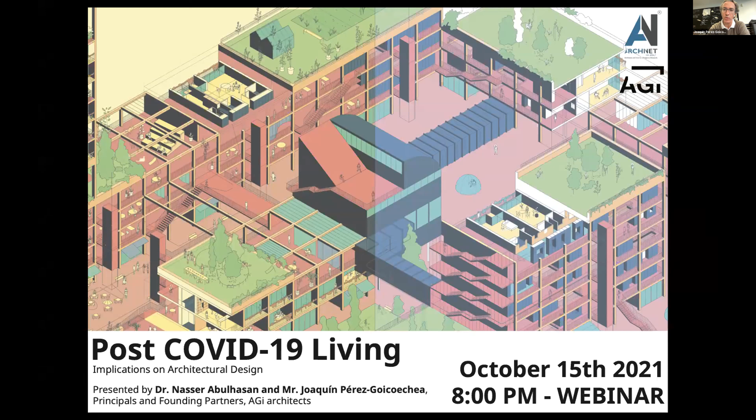The only thing that COVID has done is accelerate all these dynamics. This is why when we talk about post-COVID, we talk about something that already existed, but has brought some change in the way that we will confront, in the future, the way that we live.

The first thing that we are going to talk about, and you will see it later, is that we have structured our presentation in 4 chapters. One about the future living, where we will be addressing the main concepts of our thinking, and then how we have implemented them at different scales, because that is also quite relevant.

We will go through some of our work, but in a very fast way, mainly in images. But in each of them, we will tell you what we think, or what has been the base of our work. The first thing that we wanted to mention is the responsibility as an architect or designer in the built environment.

It is something that we have always been aware of, but right now, through the pandemic situation, it has been even more relevant. This is why when we talk about the pandemic, or the future after the pandemic, it's about how relevant it is for an architect now to approach certain issues that not only talk about health issues, but about the way we live, and the way a society develops itself.

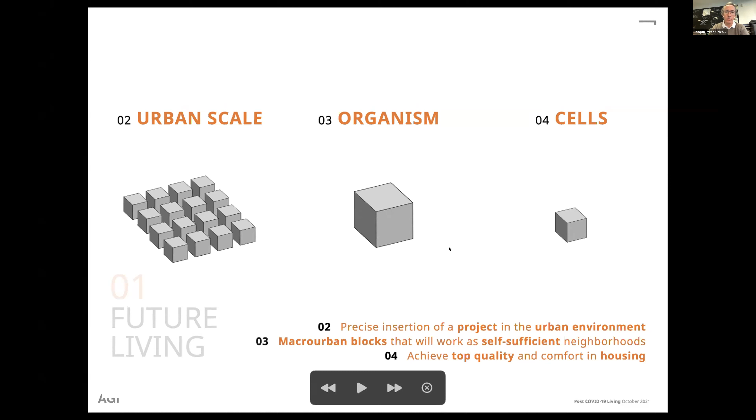But it's something that is still self-sufficient. And then we go to the level of the cell, that is the living space of any inhabitant that we know we are addressing, that we are just thinking or designing for.

What is important for us, for sure, and you will see it later on, is a mind map that we have done, and we normally do it in all our projects.

There are certain parameters, certain issues that we consider have to be addressed constantly, which is sustainability. These are the parameters that we have seen in many cases have been neglected, but right now it's something that, although we were addressing it in certain cases, we see that it's extremely even more relevant to address now. So, adaptability...

Transformability — why are we saying that? Because we cannot destroy cities to rebuild new cities. We will need to work with the urban fabric, the existing urban fabric, and transform it into a positive, or healthy, unit.

And to provide these other parameters that we like to talk about in healthy living, linked with an identity. An identity, when we talk about it, is really a topic that especially in the Middle East a lot of people like to talk about. It already involves so many things, from society to culture to politics to economics.

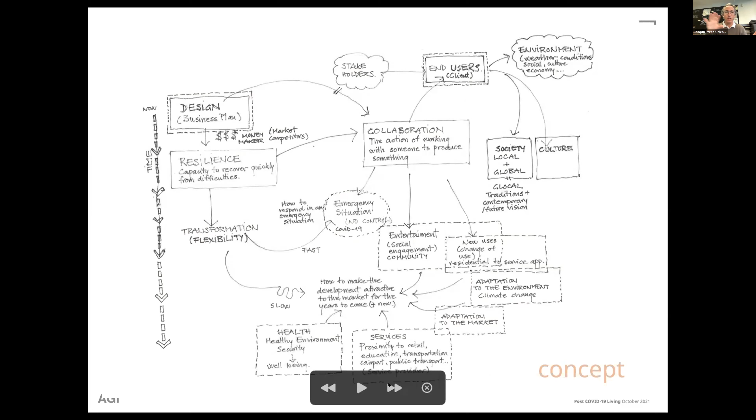So again, when we confront any project, we are always talking about these types of topics: collaboration, resilience, business plan. Even a business plan, because unless the projects we do have resilience in time, it's going to be very difficult to make them successful. And business plan, we're not always only talking about a business plan for the developer, it has to be successful for the whole society at all levels.

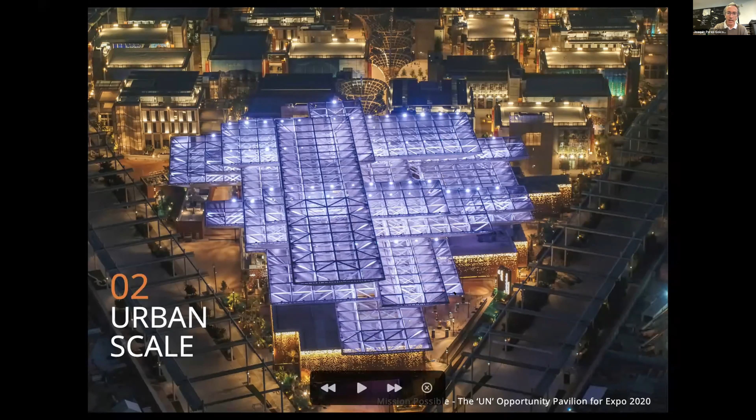One of the things that, let's jump now a bit more into our work, is the Opportunity Pavilion, a project that we just finished. It addresses one of the things that for us has been one of the main issues that the pandemic has also brought: the importance of the public realm.

How needed is this contact between different human beings, and how these options, how the pedestrians move around the city.

In many cases, and this is a bit of a pity in many places in the Middle East especially, but also elsewhere, a foreign model was implemented, neglecting so many things that created the identity of this society.

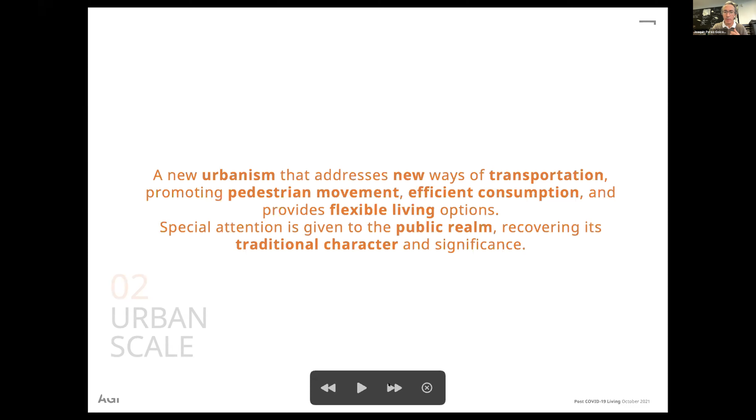And everything in many cases was kind of, how could I say it, represented in the public realm. So this is why the public realm for us has been very critical, and working in the public realm is still very critical. We show you right now the Opportunity Pavilion of Expo 2020, a building that turns around this plaza, okay?

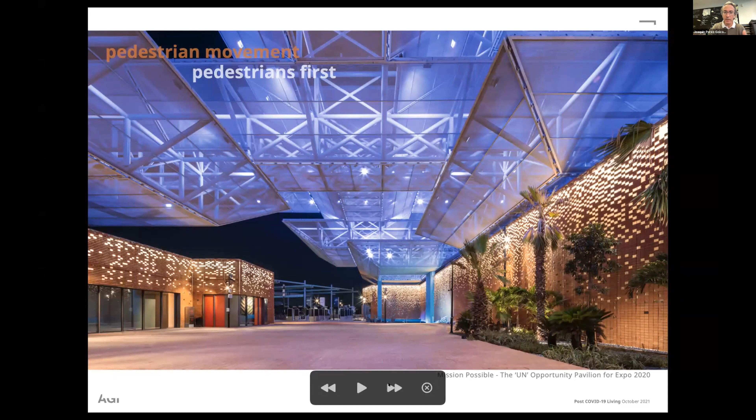It really connects the whole district, the Opportunity District, with our building. It's not about a building itself, an object itself, it's about a space of engagement.

Sorry about the pictures, these are not the best, we are just shooting as we speak. But for us, the core of this building, of this project, was how to create a space for engagement.

This is linked to the exhibition topic that was given by Expo 2020. Take into account, this is one of the three thematic pavilions of the Expo. It talks about opportunity, meaning the relation between human beings and how the impact, the action of one person, could have a huge impact.

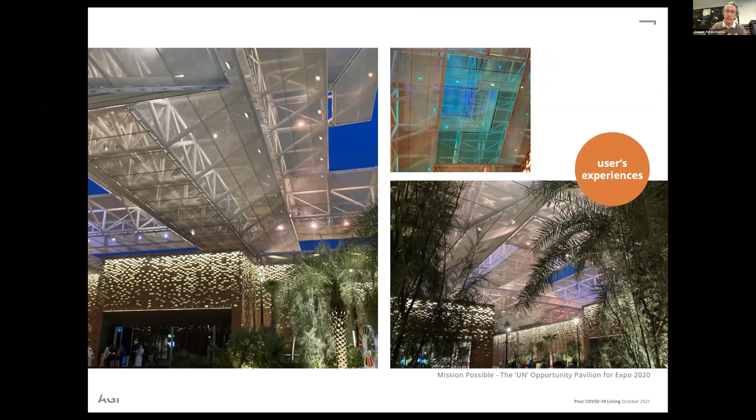So this is why we said, okay, let's create a building that is not a building. Let's create a public space in which that engagement could happen. And this is something that I'll show you very briefly.

It is represented by what we call the Earth, two different spaces. One is where the building itself is, this kind of earthy building that extends all over and extends to the outside, creating a kind of a carpet that again goes back to this idea of engagement, social engagement.

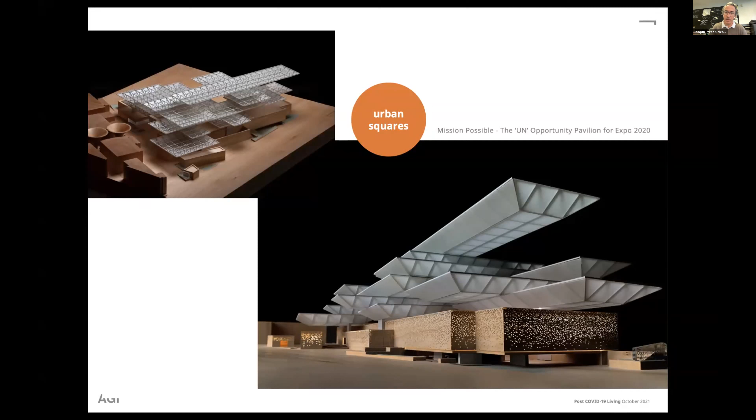And then this huge canopy that you have seen before, okay, this huge canopy that for us also represents the dreams of the human being. It's all linked to this idea of protection, of how we create a space that is healthy to stay in.

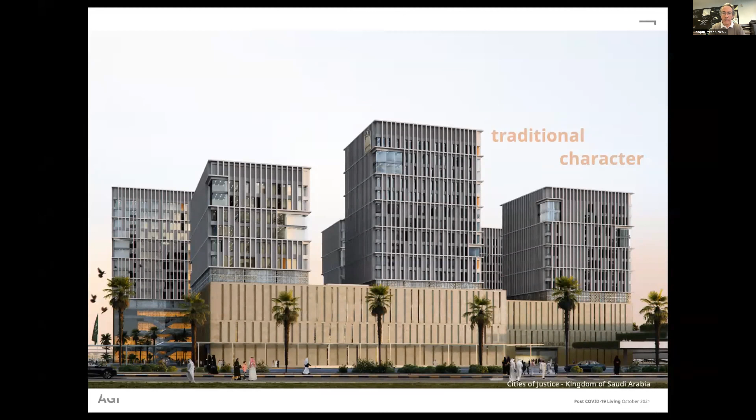It's a pleasant space, and it's in constant transformation, and it's a space where we propose people to interact. People might say, okay, yes, very good, but this is an approach that could only be implemented in very few buildings. No, we have done it, for instance, in a hospital.

Here we take it to a courthouse, what we call a city of justice. This is a project competition that we won at the end of last year. Unfortunately it hasn't gone through, but it was a very interesting competition that we did.

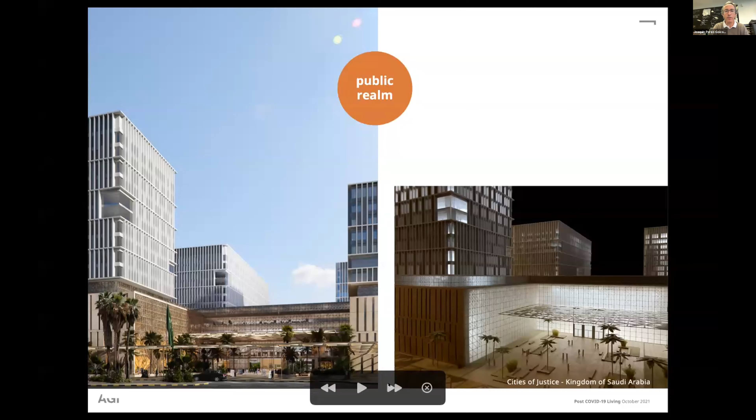And in the same way, everything turned around a public space, an enclosed public space from which we connected the different units. There were offices and courthouses, but again, everything revolved around the public realm, which for us is the core in many of our projects.

Again, why are we saying that? Because it goes back to this idea of how to build a stronger society, how to build a society in which we could share things, we could collaborate more. That will make it more feasible financially, but also from the cultural point of view, it will enrich the society and enrich the whole space.

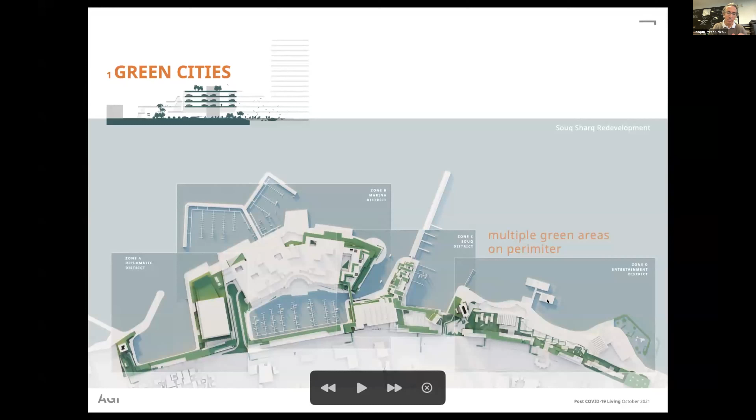This is another project, a waterfront development that we did also last year, a bit before the pandemic. And again, the same topics come back, one after the other, and everything turns around this way of engagement. I'll go fast.

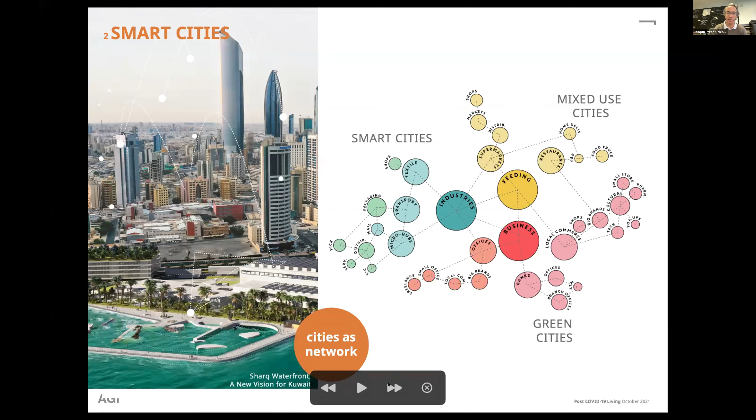In many cases you'll hear, what about smart cities? We don't think about smart cities. We think about how to build smart, meaning that refers also to the heritage that we have received, and unfortunately we have neglected in many cases, how to interconnect the different services.

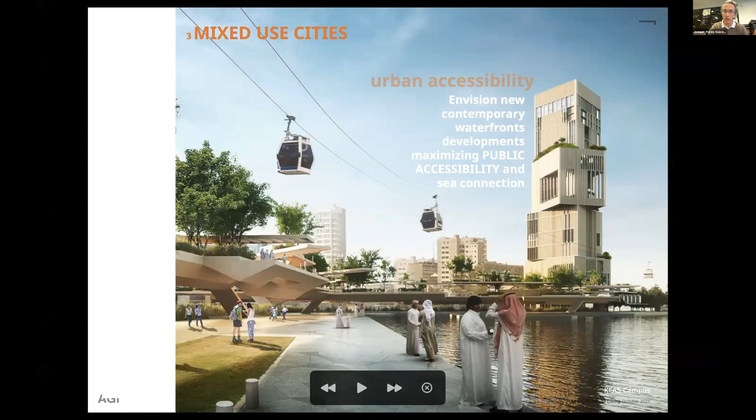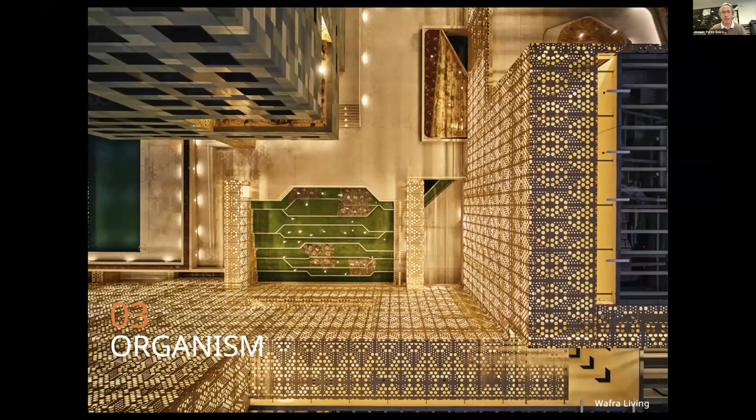This is another project also for Kuwait, another part of Kuwait, another waterfront development, always with this idea of how to create a space that is more collaborative. If we do a tower, why should it be built in glass? Things like that. So this is something extremely relevant for us, and everything turns around it.

But as I was mentioning before, the pandemic accelerated all these dynamics, but the dynamics already existed. And what it's pushing right now is to be more conscious of the main problems that each society and each city has.

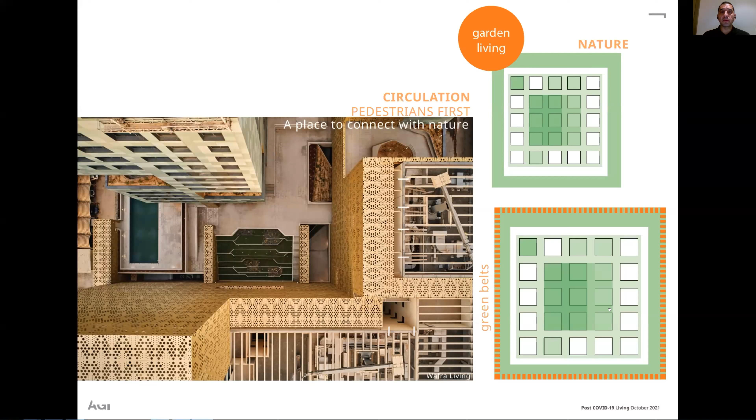Obviously, circulation is another element that we always talk about. It's a place where we ensure that people cross, are able to actually socialize, are able to connect, and there are places of creating opportunities between people in the pedestrian world.

The other element, as we call it further, is actually the flexible configuration. So within the design, obviously we start to look at flexibility, but also we start to look at orientation. So how do we begin to orient the project?

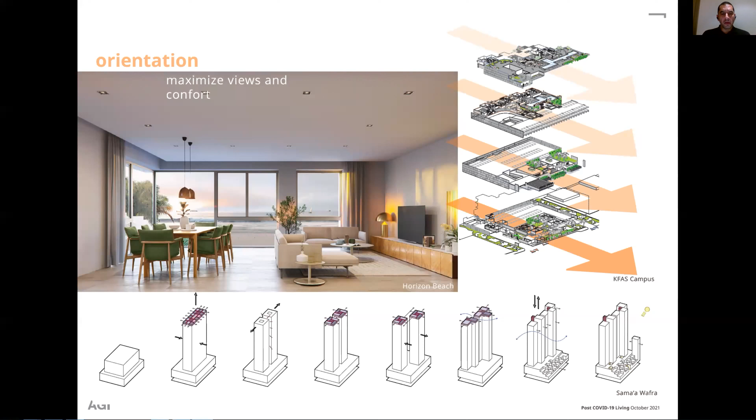How do we begin to look at views, look at the sun shade, look at the positioning, but much more importantly, try to orient them to increase an environment similar to ours - privacy - and to create as much comfort for the users and as much views to the outside.

Another topic which we also discussed is flexibility. Obviously, the idea of flexibility is inherent in all the designs, but it's very important that we emphasize that adaptability within a flexible world will allow us to change, and will allow us to use that change to our advantage to improve the living environment.

Self-sufficiency is also a topic that we continuously talk about, especially in larger developments. Most importantly is how we begin to integrate between all the components of a larger project or city, so they depend on each other from a programmatic point of view. That's something we can look at not only as a program, but also as a form of revenue, or even as a way of enhancing the comfort of the users.

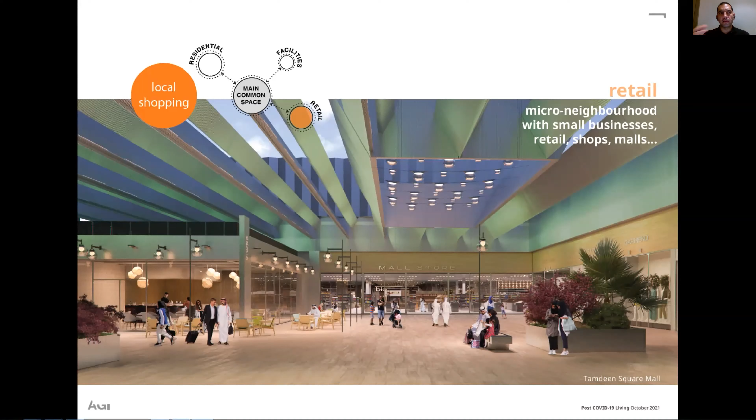Shopping continues to be a means to bring people together, but also to ensure that there is life that could happen throughout the whole day. So the idea is actually ensuring that neighborhoods depend on each other - small businesses, larger businesses, workspaces, green spaces - all of these have to come together and constantly be able to live off each other.

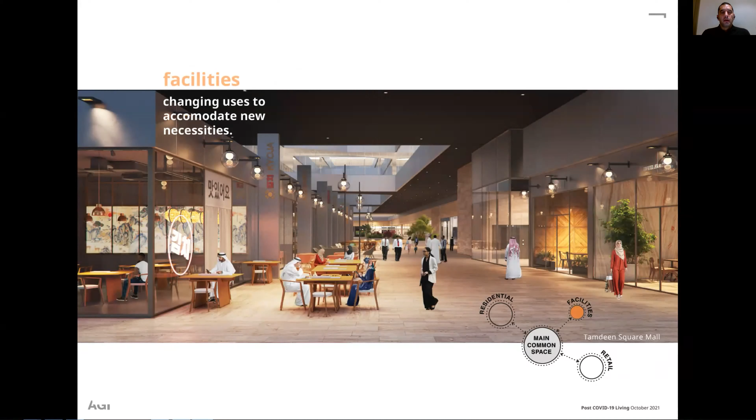General facilities - this is something that in every development we have to ensure: these common spaces and multiple types of common spaces begin to help users to use them, and to change, and to allow them to change.

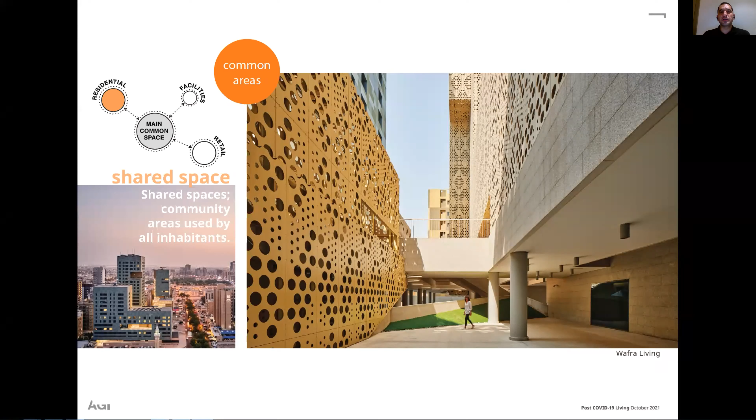Again, this begins to define what we are calling the shared spaces. The shared spaces in a built environment historically were the driver for people to come together. I think this is something we should constantly look into as we develop, and bring them back into the cities and the public realm, ensuring that we can constantly work on shared spaces - obviously in homes, in larger developments, and also on the city level.

Where are the opportunities in shared spaces? These are the places where we could play, where we could begin to work, where we begin to garden, where we begin to meet together. And in the advantage of the larger developments as we see them right now, we don't constantly need to see it on the horizontal scale.

We could actually begin to see it vertically. So the higher you go in terms of the height of the buildings, you're able to create multiple levels with different types of privacy and different types of programs, and how these shared spaces begin to help us come together.

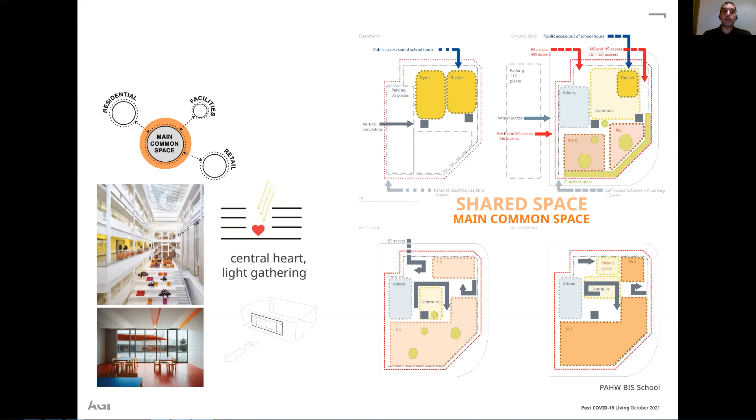In this example, which is a school we're developing right now, we look at the common spaces as the educational spaces, and the classrooms just become supporting spaces to the common spaces, which are the heart of the education environment itself. This is based on studies we continuously explore and research, that students learn more outside the classroom than they learn in the classroom, which is the best reference for how these common shared spaces work.

What's the advantage of those spaces? Those spaces we mentioned earlier, whether on a city level, a building level, or even a personal level within a home, are all places that could be transformed. And transformed, like we all have in the past year and a half, if not more, where we had to adapt or transform our homes, our backyards, or even our neighborhoods to be able to adapt to change.

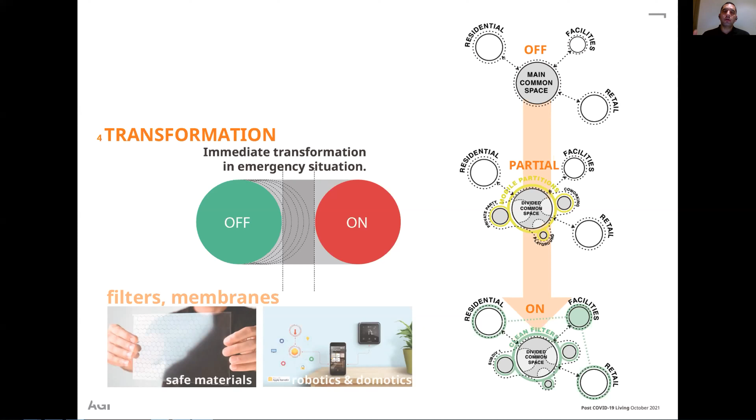And the primary change we all went through, the pandemic, forced us to change our habits. We believe that from now on this has to be inherent in every project, which is the idea of transformability.

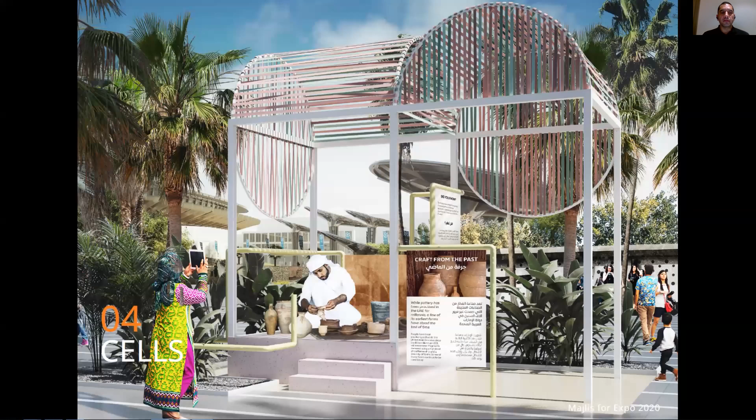So when we move back to the fourth chapter, which is the cell, obviously the scale is much smaller, but within the same overall plans. So within the cell, we try to ensure the highest level of comfort with the minimal impact to the environment. And that's something that is very important to us.

As we begin to develop these projects, we have to ensure that we are responsible on the cell level, which is the smallest level, that we respond to three main drivers: the climate, the landscape, and the environment. With passive strategies that we continuously experiment with, we are able to address these three elements in quite a natural way, or from a humanistic point of view—it's actually second nature to us as humans.

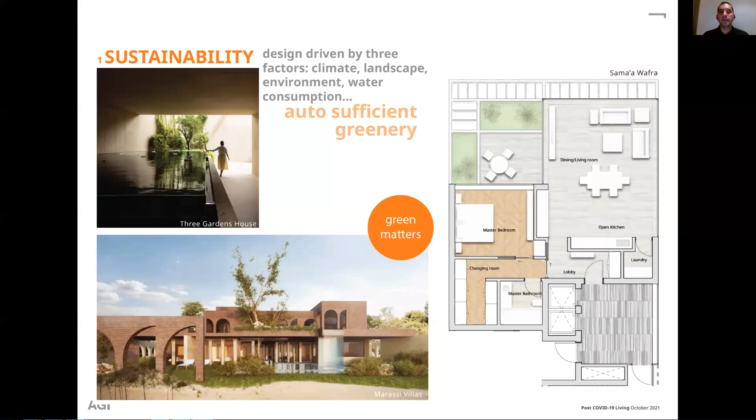So as we begin to develop passively, we're able to not only look towards the views, but also begin to adapt to the wind, begin to adapt to the sun, and begin to actually adapt to the colder breeze, ensuring that we as humans are able to create our own sustainable environment in the most efficient way possible.

Obviously, ideas related to passive strategies are something that has been inherent in a climate similar to ours here in the Middle East, and primarily in the Gulf region. We continue to push forward to ensure that we implement them all over.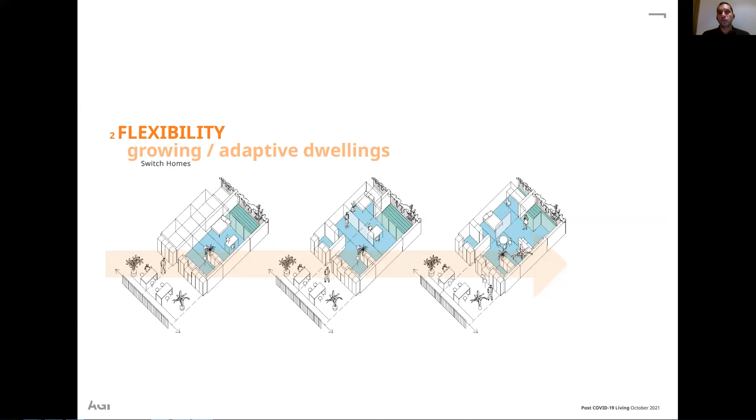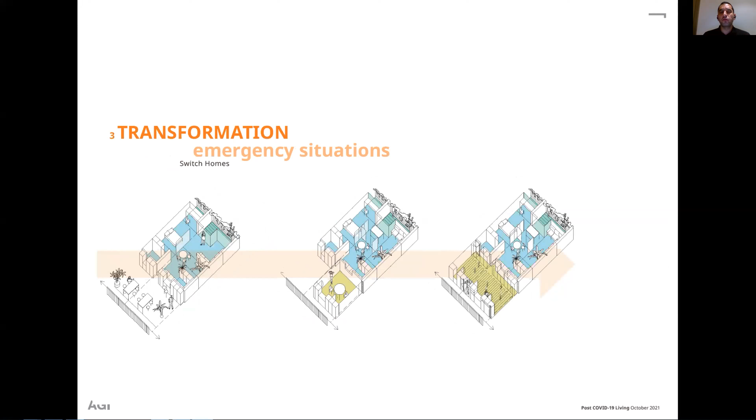As we go further in this, we go back to the flexibility within the unit and how we begin, within the cell, to change the spaces and adapt them to the needs, whether vertically or horizontally. We do the transformations as families get bigger or smaller, how the changes have to switch, or in the case of pandemics, where we are forced to change usage within these spaces.

And on a public level, which for us is quite important, how do we begin to ensure that the public scale, which is the larger level, begins to adapt to our traditions? We believe this is a project that will soon be launched in Expo 2020, one of our latest projects, called the Majlis project.

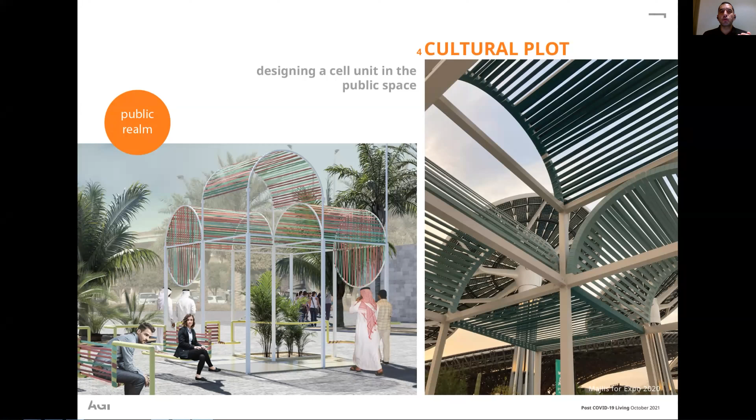It's a reinterpretation of the living room, which is the private living room, but onto a much larger urban scale. So we have taken the idea of the traditional gathering space within this part of the world and readapted it on a much larger scale, where we wanted to bring people to talk, to be able to connect, and more so to be represented with the ideas of the culture we were working in, and more importantly, ideas of what we believe as humans—how do we begin to connect people together.

Thank you very much.

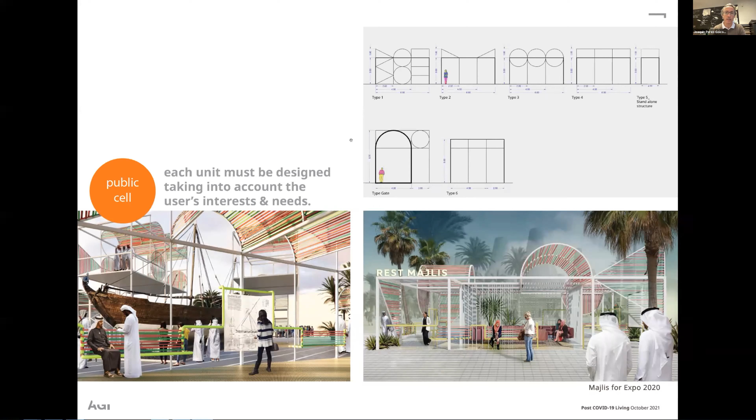In some cases we have been more successful than others. For instance, the project of Wafra Living in Kuwait has been very successful. We haven't provided a huge effort—just a small platform at different levels of connectivity for the residents to interact, and it has been extremely successful.

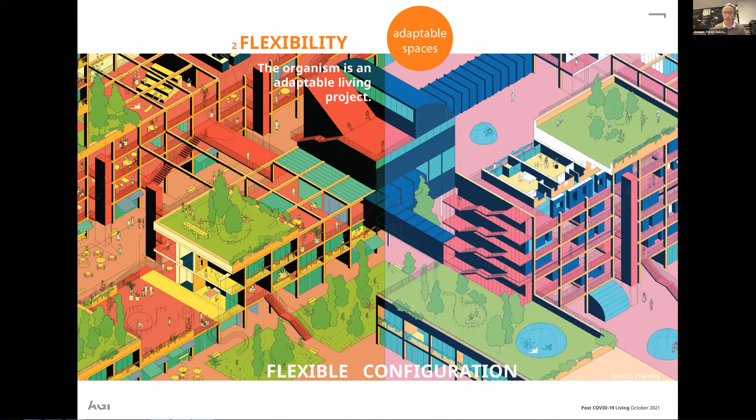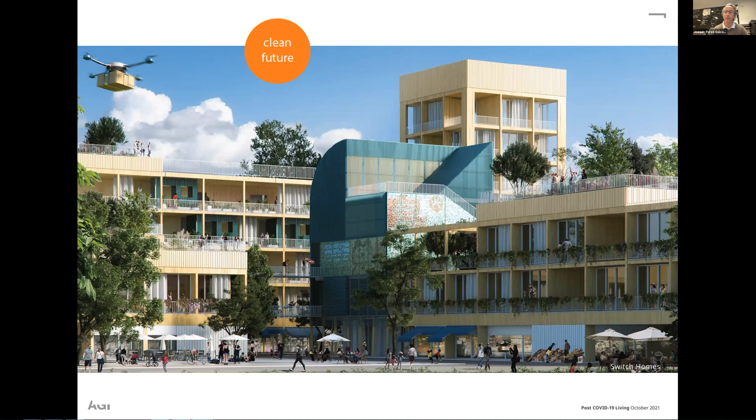But if people don't have that space to interact, then us as architects, I think we have to provide it. We have to find excuses to do it in all of our projects, because this enriches not only the culture, the society, the economy, but many other aspects of that complexity this person is referring to.

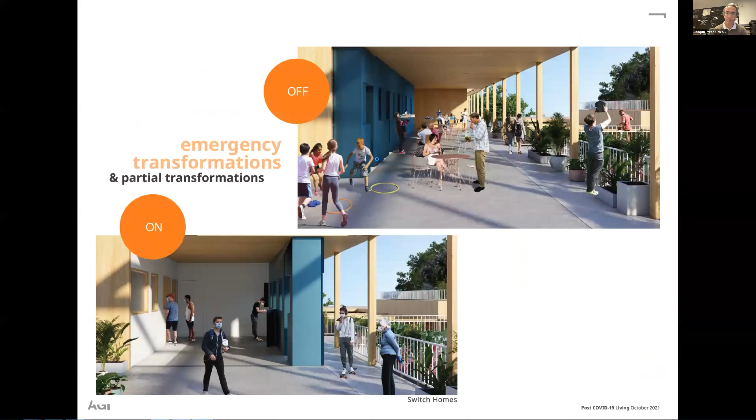I don't know, Nassir, if you want to extend a bit more? No, I think when it comes to human engagement, respectful of where we're coming from and the society we're living in, humans are naturally drawn to each other. And we as urbanists and architects, unfortunately, at one point decided to actually detach humans from each other, whether consciously or unconsciously.

This happened after the Second World War. People are drawn to be closer, people are drawn to be much more interactive. And I think we have the mandate to create the comfort spaces, create the environment to allow people to come together, and they will naturally be drawn.

Yes, there are sensibilities between different cultures that we architects have to begin to address, and this is natural from the scale, the wind, the sun—these are basics. We tend to forget them when we design cities, and more so with large buildings and urban fabrics. But if we look at the human scale, that will change how we address architecture as well as urbanism.

We're going to take the last question: How was the impact of hot climate in Kuwait on the design of outdoor spaces?

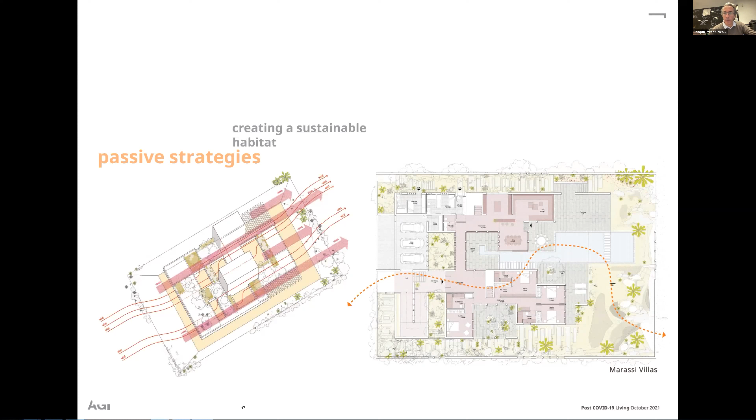I don't know, Joaquin, if you want to add anything. No, you've said it. I think there are many examples—just to make it short, for instance, the other day with the opening of Expo 2020, extremely high temperature, high humidity, we went into our pavilion within the plaza. I'm not saying it was cold or something like that, but compared to the avenues, compared to the concourses, it was a completely different perception, as Nassir is saying.

We created a draft of wind that was constantly flowing, so that made the people who were there feel like it was definitely not an air-conditioned space, but it made it kind of a pleasant space to be in. So with these small things, I think we could achieve really high goals.